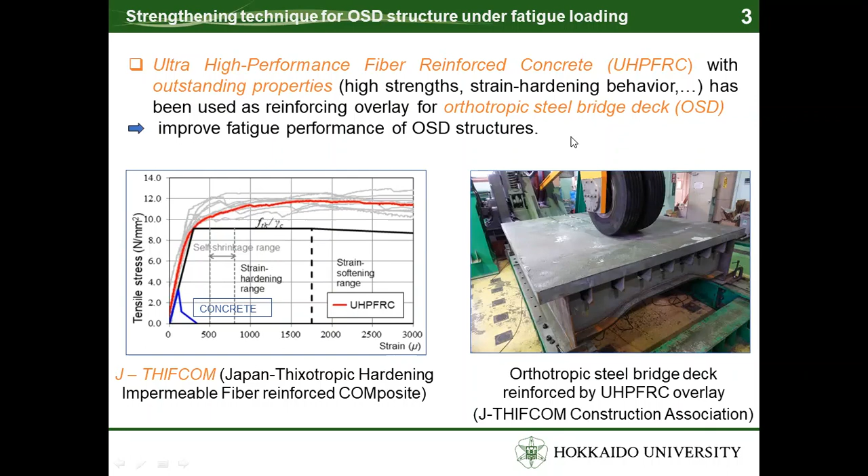Introduction. The ultra-high performance fiber reinforced concrete (UHPFRC), with outstanding properties such as high strength and strain hardening behavior, has been used as reinforcing overlays for orthotropic steel bridge decks to improve the fatigue performance of this kind of structure.

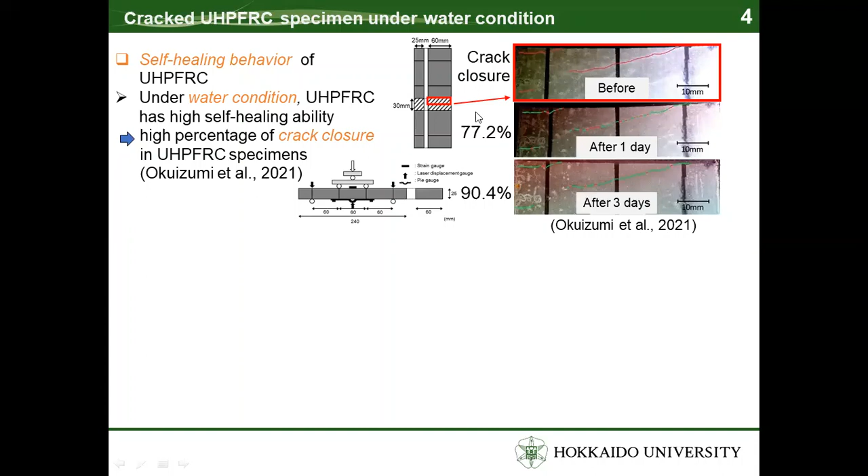Under water conditions, UHPFRC has high self-healing ability, represented by the high percentage of crack closure in UHPFRC specimens.

However, under fatigue loading, a reduction of the fatigue life of concrete material under water conditions has been reported. The objective of this research is to develop analytical models based on the finite element method to investigate the fatigue behavior of UHPFRC steel composite decks subjected to moving wheel loading under surface water conditions. The self-healing behavior and reduction of the fatigue life are considered in the material model of cracked UHPFRC. The analysis will be verified with experiments from the J-THIFCOM Construction Association.

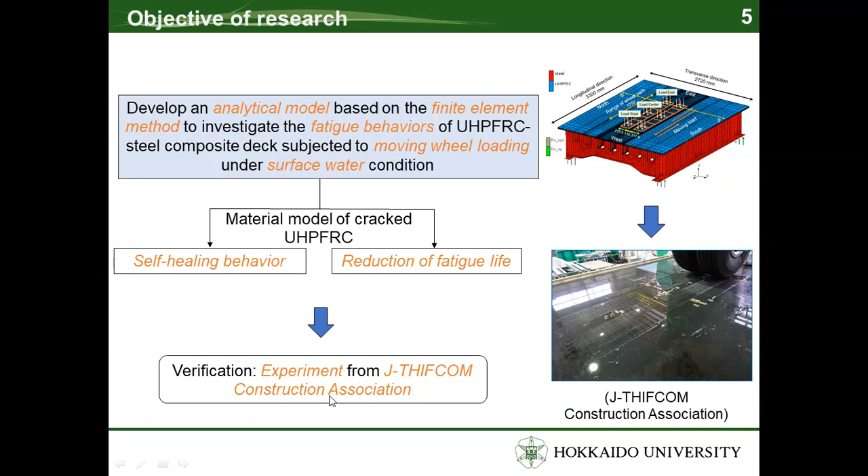Material model of UHPFRC. After the first stage under dry conditions, water has been supplied on the top surface of the overlay for 1 night before stage 2 of the fatigue test.

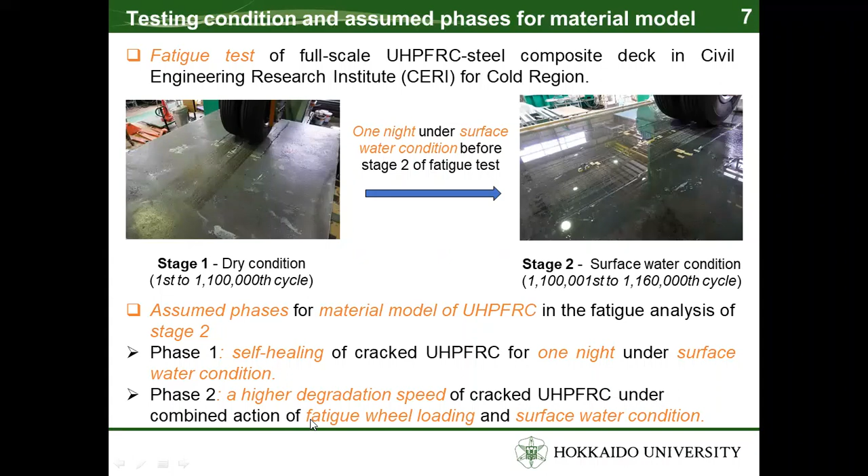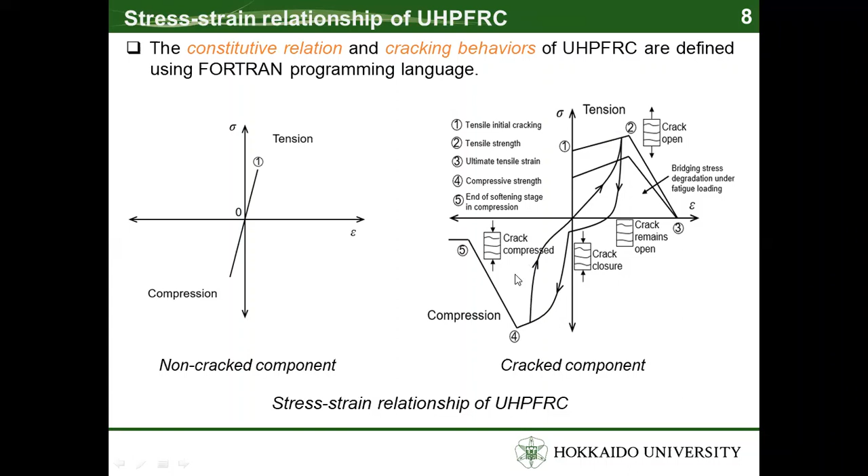There are several phases for the material model of UHPFRC in the fatigue analysis of stage 2. Phase 1: self-healing of UHPFRC for 1 night under surface water conditions. Phase 2: a higher degradation speed of UHPFRC under combined actions of fatigue wheel loading and surface water conditions. The stress-strain relationship of UHPFRC is shown in these figures, decomposed into non-crack component and crack component.

For phase 1 of the material model, the self-healing of UHPFRC in terms of increasing reloading stiffness and tensile strength under surface water conditions is considered in the fatigue analysis, and the recovery ratio is chosen as 70% in this current model.

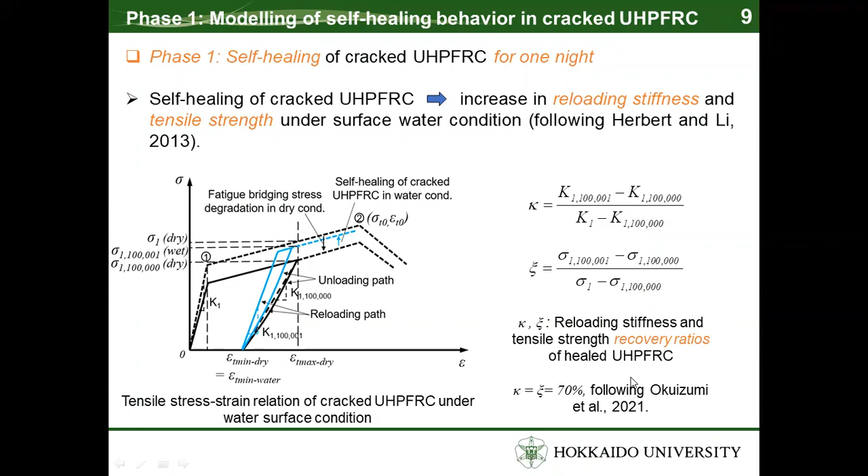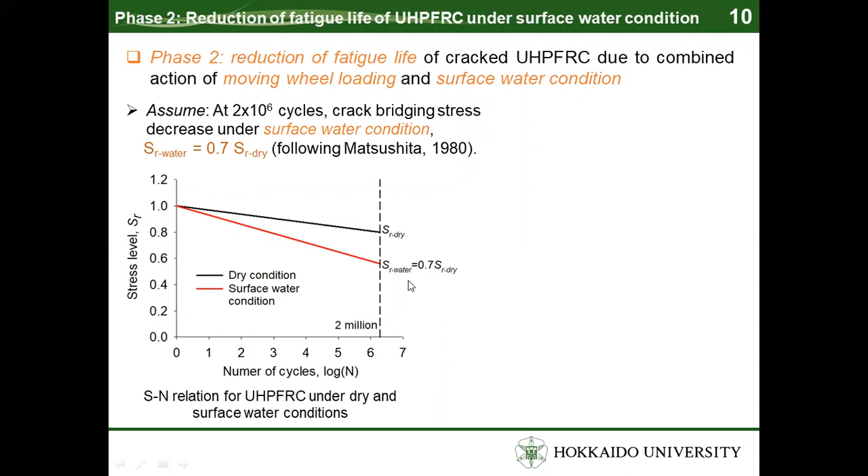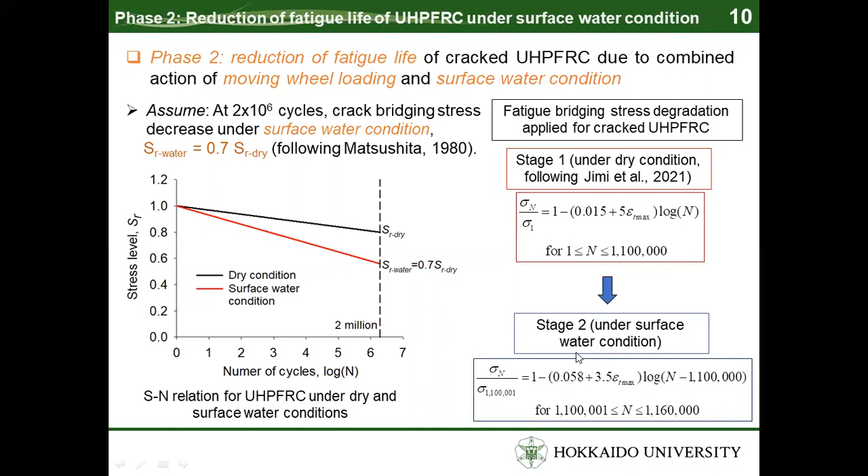For phase 2 of the material model, it is assumed that at 2 million cycles, the stress level in water conditions is chosen as 70% of that from dry conditions. The bridging stress relation applied for cracked UHPFRC under surface water conditions in stage 2 can be calculated as shown in this equation.

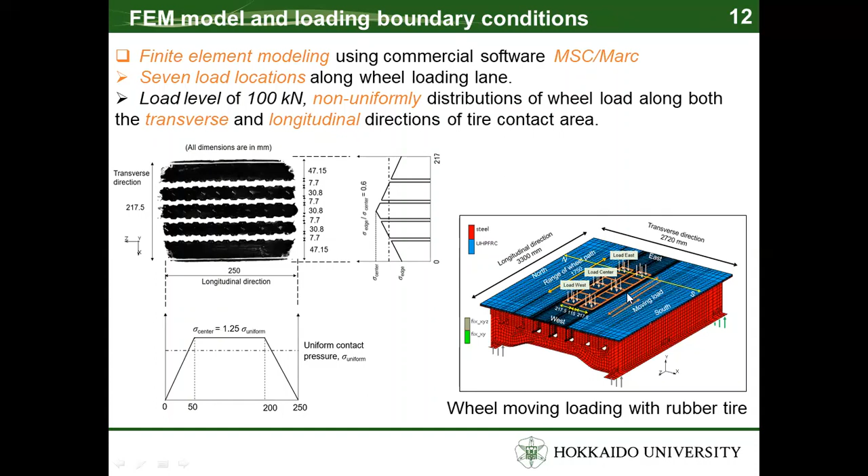With a load level of 100 kN, the non-uniform distribution of the wheel load along the transverse and longitudinal directions is assigned for the tire contact area, as shown in this figure.

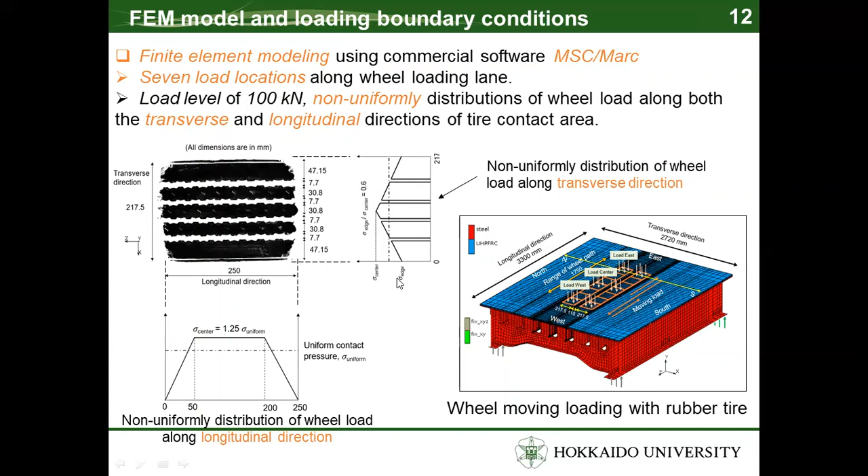Fatigue degradation model for the UHPFRC-steel interface. The total expansion of 28 mm in the transverse direction of the delamination area at the interface is applied in stage 2, giving the same expansion speed from the previous stage under dry conditions.

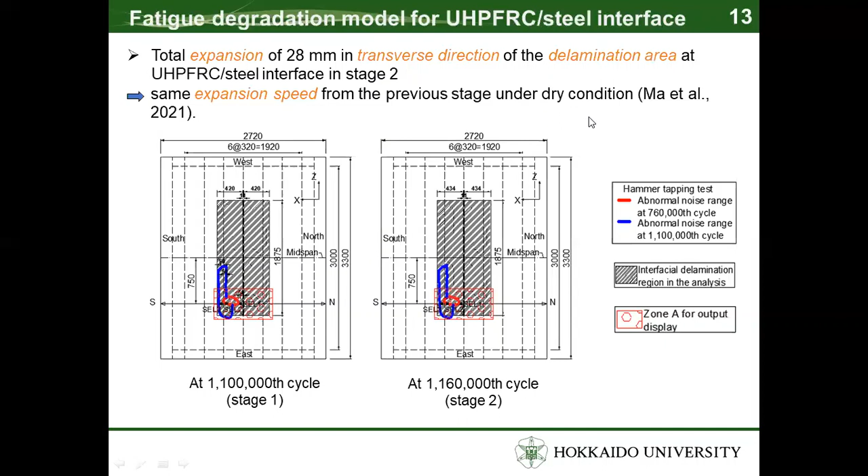Result and discussion. This figure shows the transverse strain range result at the strain gauge SEL1 in the steel deck plate. In stage 1, due to the occurrence and expansion of the delamination area at the UHPFRC-steel interface, a significant increase in transverse strain range can be observed, as shown in this figure.

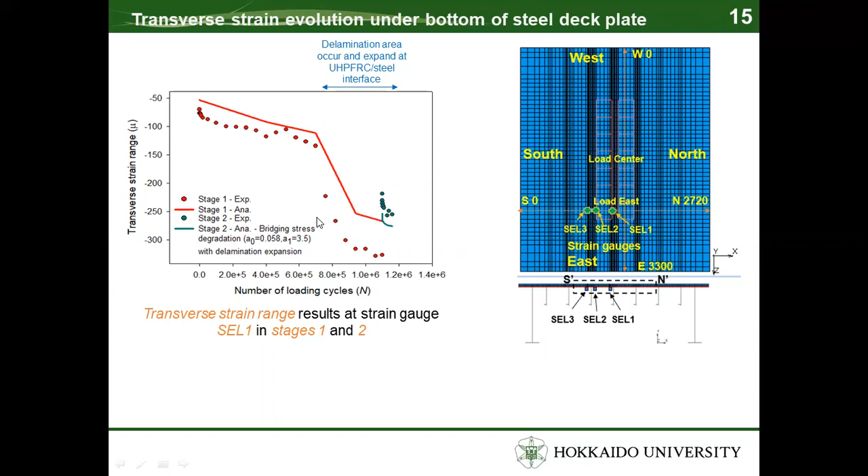After that, in stage 2, under surface water conditions, due to the recovery in reloading stiffness and tensile strength caused by the self-healing of UHPFRC, a decrease in strain range level is obtained at the beginning of stage 2.

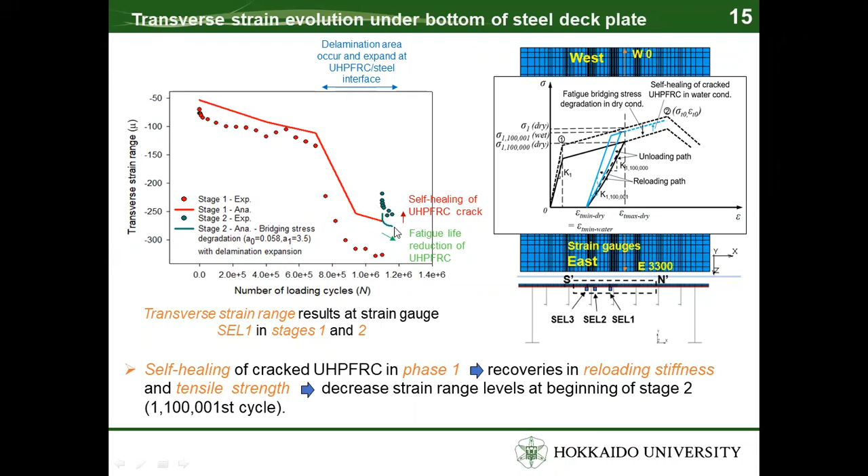After that, under moving wheel loading, due to the fatigue life reduction of UHPFRC, an increasing tendency of the downward strain range at this location can be observed.

In phase 2 of the material model of UHPFRC, by applying a higher speed of bridging stress degradation in UHPFRC, an acceptable agreement in tendency between analytical and experimental strain range results could be obtained, especially for the early cycles of this stage.

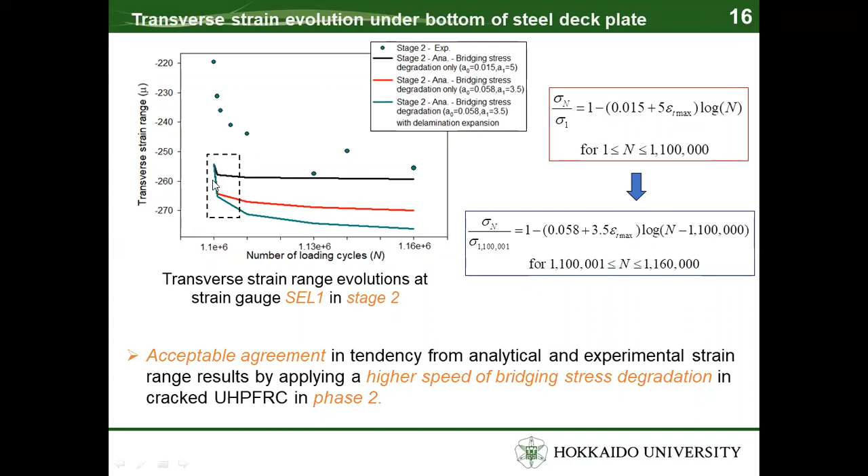This figure shows the maximum principal strain distribution on the top surface of the UHPFRC overlay at zone A. The crack regions are shown by a spectrum from blue to red color.

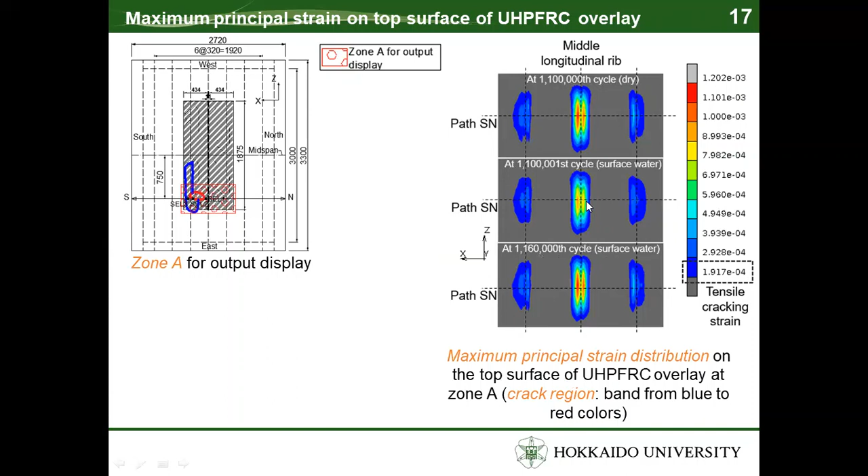In phase 1, due to the self-healing of UHPFRC cracks, the maximum principal strain value decreased, as shown in this figure. Then, under moving wheel loading, due to the reduction of the fatigue life of UHPFRC, an increase in maximum principal strain level could be obtained throughout phase 2, as shown in this figure.

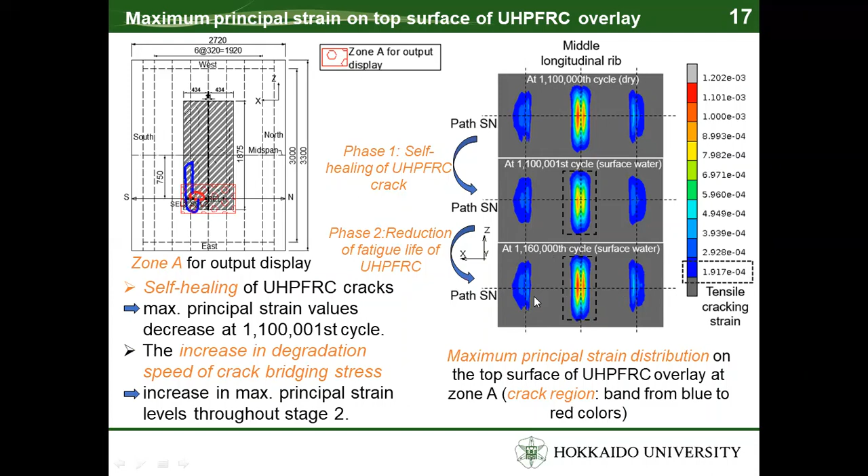Conclusion. 3D FEM models were performed to investigate the fatigue behavior of UHPFRC steel composite bridge deck subjected to moving wheel loading under surface water conditions.

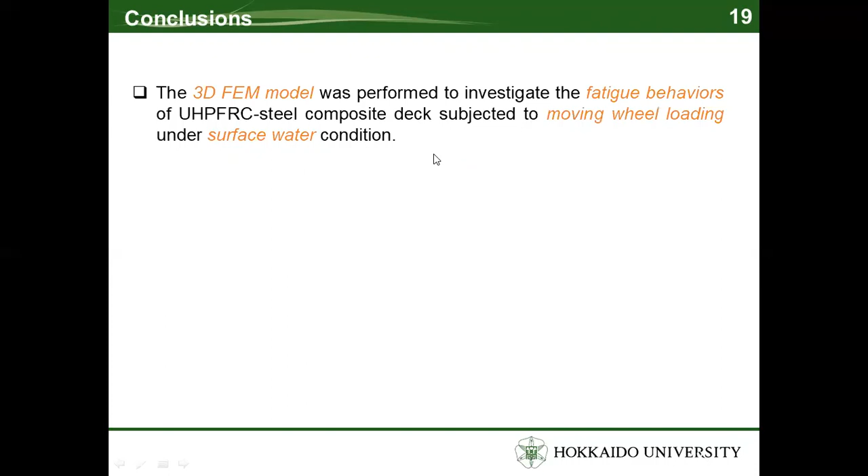Due to the self-healing of fine cracks in the UHPFRC overlay, the mechanical recovery of reloading stiffness and tensile strength from the cracks is obtained.

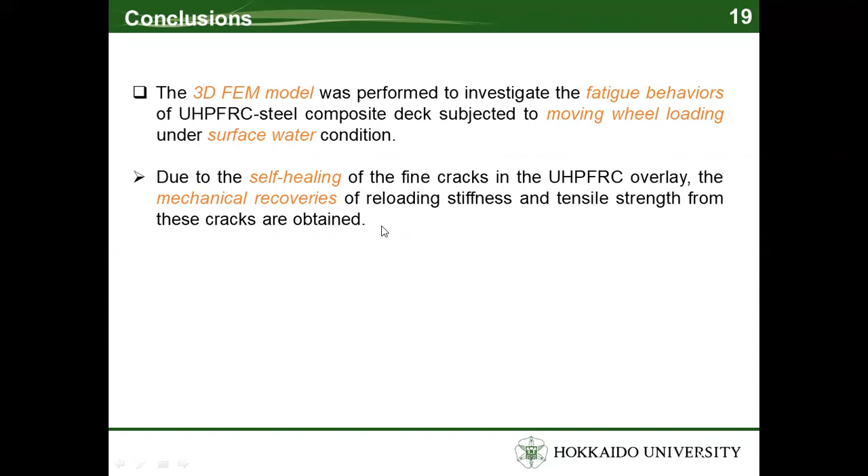Later, under moving wheel loading, by considering a higher speed of bridging stress degradation in cracked UHPFRC, the analytical strain range result of the steel deck plate exhibits an acceptable agreement in tendency in comparison to those from experiment.